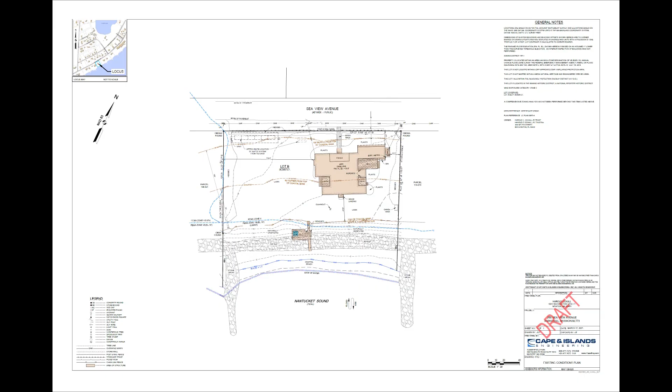Yes, thank you. Will you be clicking through as you go? Yep. Okay, thank you, Kurt. So, when we looked at this site, we kind of tried to approach it a few different ways in terms of how do we obviously keep the structure, and enhance it to provide the use that the owners are looking for, in terms of a modest expansion and a renovation of the existing condition.

And given the unique layout of the home and its age, it has settled quite a bit in terms of its foundation. When you're just walking around the floors, they are all quite uneven. You could be in one dining room that has a 4-inch difference in a 12-foot span.

And then there's also the first floor layout itself, in terms of it just being a series of rooms and having the sort of unfortunate layout, in my opinion, of what was built as the 1907 servants' quarters on the upper right-hand side as the primary kitchen area. It's completely cut off from the main portion of the home, where you have to pass through a pantry to get to it.

And then above that section of the home, there is, for lack of a better term, a very illegal, non-code-compliant stair leading to 2 bedrooms. I've seen many old homes and it is not safe. It's winder treads, very narrow, not something to try to work with.

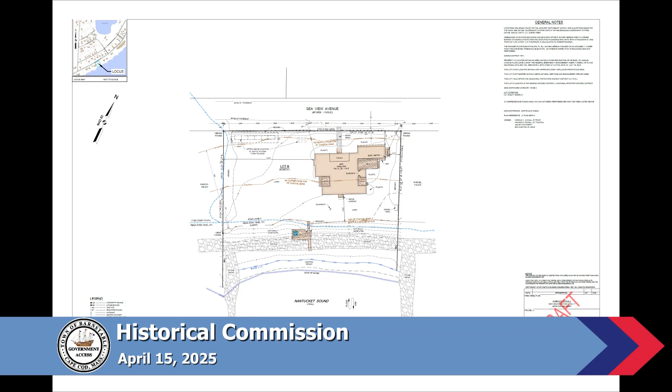So I guess if you could flip through to the site, to some of the existing photographs, please. Should be in order. Here we just have a location map for reference, and looking through the next slide, we go through the existing photographs of the home.

See, it's not advancing at all. Oh, okay, can't just touch the screen and make it flip all the time. I'm teasing. Bob, I have a hard copy of that upstairs.

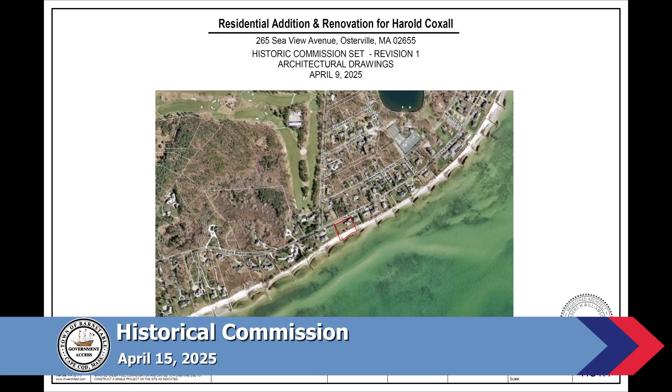Okay, there we go. So some of the important and remarkable architectural features of the home are the sweeping sloped roofs of the main body of the original home, gable dormers with the shed connecting dormer to make that Nantucket dormer, as we call it now.

Double hung windows, the walls do go right down to ground level. That is also a feature, but it's not great in terms of maintenance, as you can see from the photographs of the moss growing up from the ground.

Another important architectural feature is how there was a gambrel element on the right-hand upper corner of the main body of the house that, maybe I'm just assuming, but may have inspired the design of the 1907 wing with the gambrel roof structure, and the Riverstone fireplace with the second floor overhang. Then that turns, and the chimney turns into a painted white brick chimney from there.

And then another architectural feature I thought was important was the bay window to the right of the fireplace, where that is not facing the street, but it is visible from the street given the way the house is sited and how much open space there is on the right-hand side.

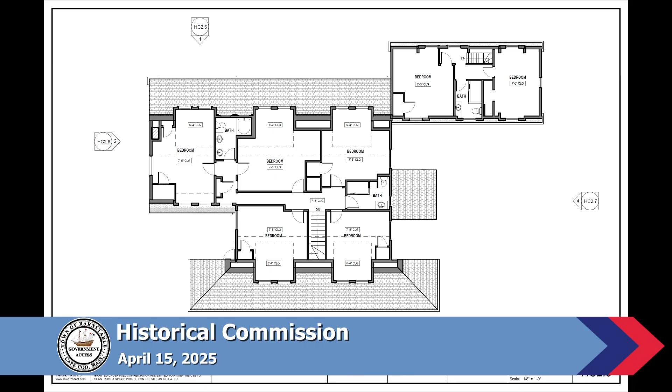Also note on the dormers, this is where the dormer reconstruction, or raising the dormer roofs, we feel is necessary because we have 6'4" ceilings in the bedroom. All of those windows are double hungs and don't even come close to meeting an egress dimension because they're very short, about 3 feet high. And 6'4" is well below the minimum code height of 7 feet for a bedroom ceiling. On the right-hand side, upper right-hand corner, you see the 2 bedrooms being served by that one very narrow, somewhat hazardous stair.

Again, the overlay diagram shows which areas would remain and be reconstructed, and also the roof plan. We can skip this one and go to the next.

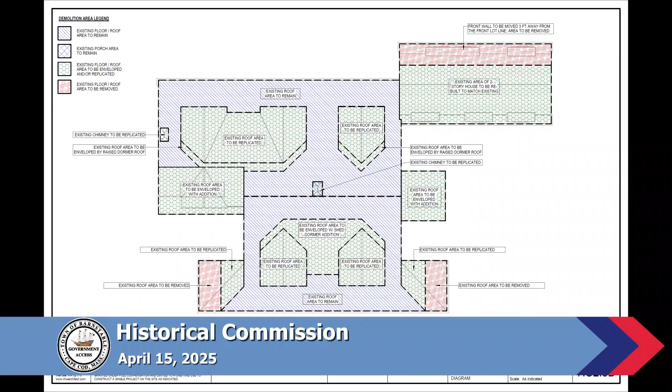And this is where I work. Sarah suggested I show the same diagrams to indicate which areas of the roof are remaining, which are being replicated or enveloped, and which would be removed as part of the construction. The dormers being raised up a foot would, as you raise the height of the roof, need to extend back to the main slope of the house, so that's where there's a bit of extension. On the back, we'd be proposing a shed dormer connection between the 2 rear dormers to match the front design, which allows for a bit of second floor bedroom expansion between those 2 bedrooms.

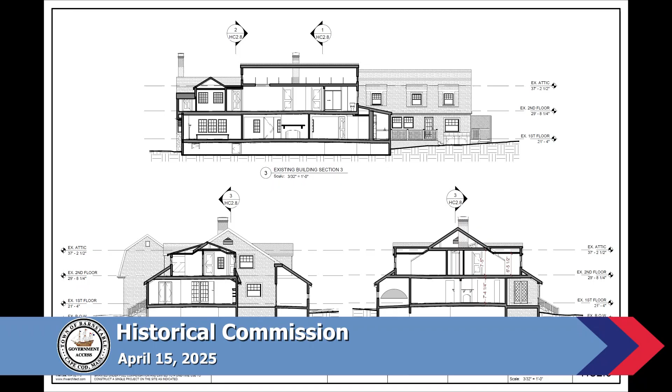You can really see it even at this scale, especially the section deflections, and on the porch too. The covered porch, sitting at a table there, has quite the pitch going up. It may have been built that way intentionally in order to drain water, you know that? Yeah, just saying. Oh yeah, but it's pretty significant, understood indeed.

So here we're moving on to the proposed portion of the presentation, where this is the architectural site plan showing the full extent of the site in terms of the reconstructed barn addition on the upper right-hand side, the small areas to be removed, the proposed two-story addition on the left, as well as the pool house on the left-hand side.

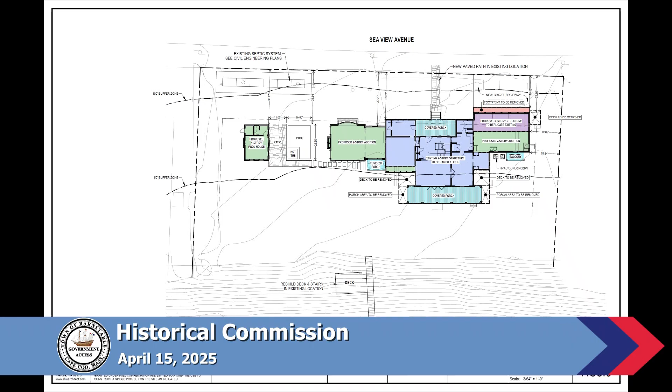So here we have the first floor proposed design. It's fun to look at now and see where it's come from since the beginning, in terms of the iterations we've done. I outlined the original section or footprint of the house in the red dotted line, so it's clear what's being added and what's remaining.

The idea is to basically keep the same entry sequence in terms of the covered porch, both the main entry door location, and there's even a secondary door location shown where I'm showing that door into the pantry, and just create a nice open floor plan where we have a proper stair in the foyer entrance, not towards the back of the house and leading back towards the street.

Give it a little bit more volume in terms of ceiling height, proposed approximately 9'2" ceiling height, and just a slight rearrangement of the spaces in terms of the living room, office, and mudroom, but still keeping the main center load-bearing wall in the middle. That's roughly where the stair is.

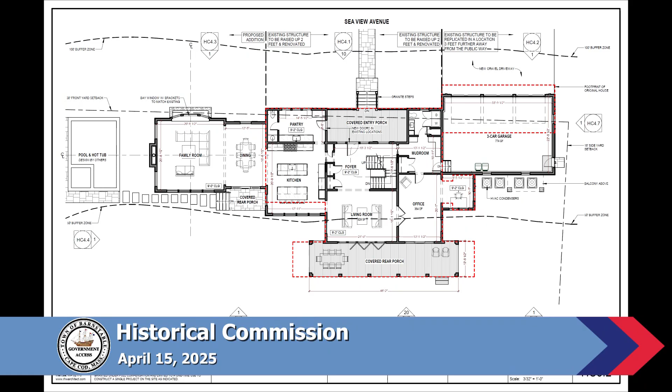Next slide, please. On the second floor, we've actually only proposed 6 bedrooms instead of 7, which was the existing condition. They are more generous and have more bathrooms in terms of them being ensuite, but we weren't planning on doing that. It's just the way the design came out.

In the previous design that was originally submitted, between bedrooms 3 and 4 on the lower part of the page, we did have a balcony proposed off the back of that, and through our working with Sarah, came up with this design where it's essentially removed. But I think where we ended up is a nice final design in terms of respecting the original architecture and proposing some modifications to meet the needs of the owner.

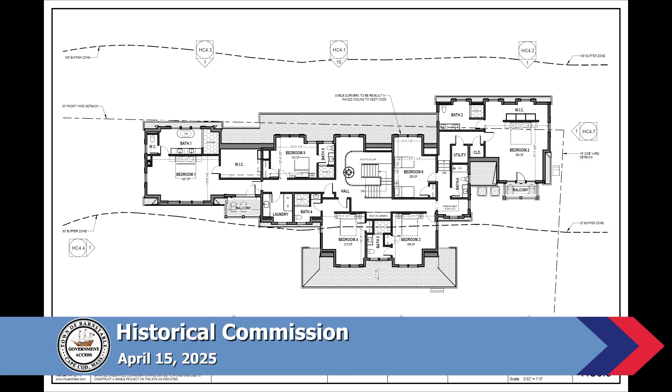Next slide, please. Proposed roof plan. Not too much to talk about here, other than we're keeping the original, putting a new wood roof on to match the existing, and same thing with the walls.

On the proposed elevations, we are just trying to keep the spirit of the main home, but also make sure that the investment the owner is putting into this property is a wise one, from a practical nature, by lifting the building up and bringing it out of the earth, and putting a foundation down when cladding that with stone, means that the new shingles you'd be putting on the home are not just sucking up moisture and growing moss on them.

So in my opinion, the front of the house, the main body, wouldn't show much notice of change between what's existing and what's proposed, given that the 3 dormers in the front would only be raised by a foot, and that allows us to have ceiling heights just above 7 feet, and have double hung windows that meet modern codes for egress.

On the reconstructed servants' quarters or barn addition from 1907, where we're proposing the 3-car garage, essentially the roof lines, in terms of the gambrel, were copied, and the dormers are rebuilt in kind to align with the new doors. They aren't in the exact location as they were, but the window height and window sizes are the same. I'm meeting egress by having an egress window on the gable end of that portion, so those windows are effectively the same size as the original.

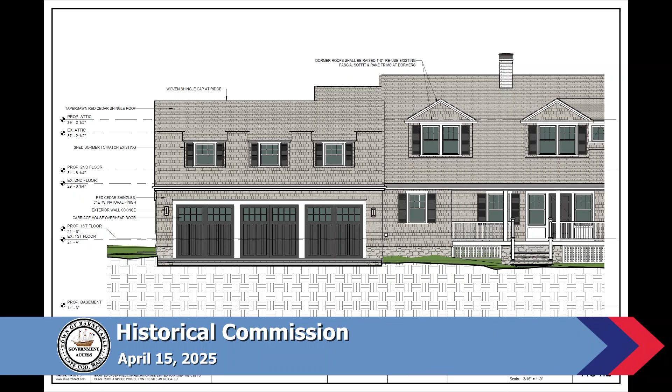Pause here. One thing we talked about with Sarah was making sure the dormers and existing details are being matched — that was very important, especially matching window trim details. It's actually not a very complicated trim package for the home.

It's 1x5 casing with historic sills, very common louver shutters. It does have a wood gutter profile — some of it has a bed molding below, some doesn't. I'm showing a new fiberglass gutter with bed molding and a simple fascia board to match existing. The bay window is bigger than the original; it would look weird otherwise, so I scaled it a bit for some wider windows so it doesn't feel out of place, and added new brackets to match the existing design.

Little things, like below the existing porch it's all shingled wall all the way down — I thought a stone base for the stairs, a pier at each column, and lattice was a more appropriate design for that. Next slide, please.

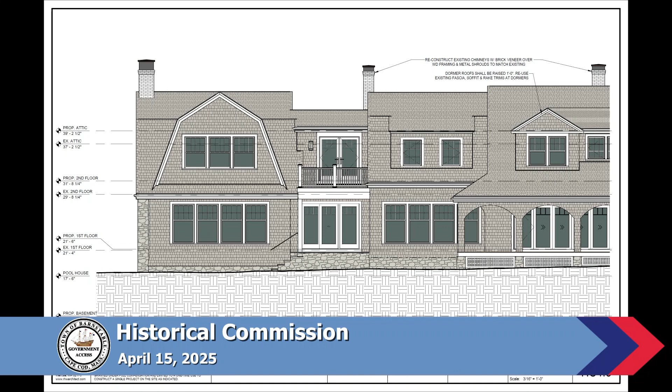This is the rear detail elevation of the addition, and just thinking of some important features to call out here — nothing that I haven't covered already. Next slide, please.

Same thing here. One area I didn't talk about specifically is how the rear portion of the reconstructed barn is handled, because the barn is not the proper depth for a garage, so it has more expansion towards the rear. Essentially I took that side gambrel elevation, copied it, and rotated it 90 degrees to bookend this piece of the house.

Facing the ocean, and likewise with the second floor addition above the existing one-story connector wing between those two areas — that's another area where I took the gambrel profile from the opposite side of the house and brought it over to this side to make that roof transition.

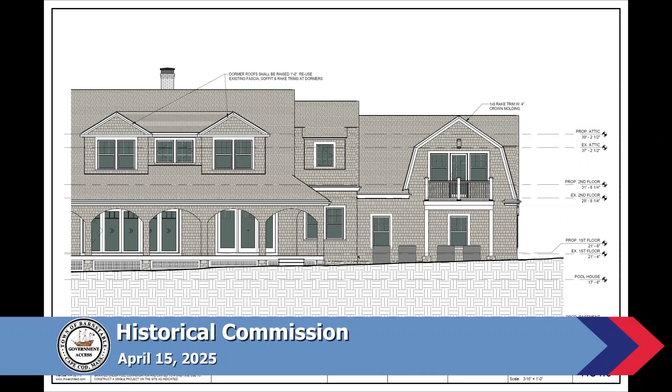And to my own surprise in the design process, there's a very basic roof cricket to handle that — there isn't a really bad snow catch that jumps out. You're not snowing anymore anyway, it's okay. But anyway, just wanted to make sure the whole roof design comes together nicely.

Next slide, please. This is where I was talking about, in terms of the right-hand side of this elevation, the existing profile overhang of that 1907 barn addition — so we're keeping that.

I didn't show any building sections here, but I will have a unique detail to make that work. Right now the 2x6 floor joists cantilever out to make that overhang, and we'll need engineered wood joists for that. We'll have to do some kind of engineered system to get that cantilever out, because I'm not going to cantilever 14 inch wood out and ruin that. I've got a plan for that.

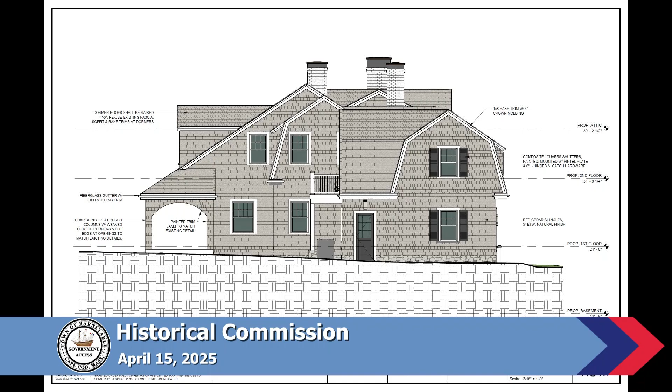This is the end of the proposed elevations. The next few slides were for the pool house, just a simple floor plan, with a nice little modest design inspired by the architecture of both the original home and the addition.

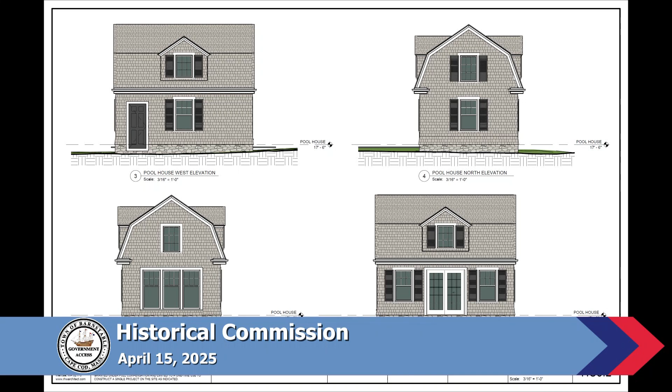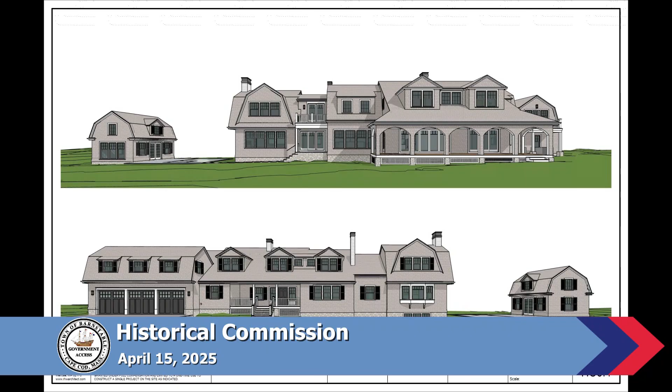Next slide please. Now we just have the 3D views for the full context. Feel free to flip through.

We could pause there. This is a good view of the arches and how we'll take the shingles down, cut them on the arch, and have a jamb return to pay reference to the original detail for the rear covered porch. We weave shingle corners on the outside, but then use a painted jamb with an exposed shingle edge at each opening.

And then I think, is that the last slide? Another one? That's it. Okay, so thank you very much.

That's awesome. Do you guys have anybody else who wishes to speak, in terms of your own team and such? I don't think so. We do have Harold, he's here, the owner. Greetings. Thank you for coming. Bob has done a great job going through it. Yeah, I do too.

Those are great drawings. One thing I'll share, and I don't feel it's necessary in this one, but one thing we've learned over a few hearings recently is the value of 3D renderings that are a little more indicative of the planes of front and back. Looking for dominance of structure, you want to be sure the new additions are subordinate in every way to the original, which these are, I think, in my opinion, but it comes across visually a little more compellingly in a rendering than in a 3D CAD drawing. Just sharing that out loud because I think it's a little easier for commissioners to compare prior and present, existing and proposed, but these are awesome.

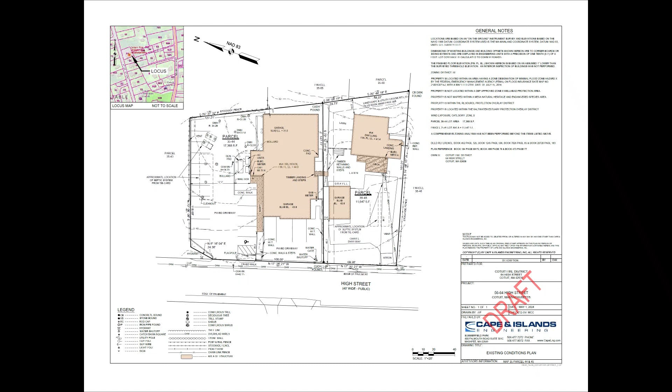The first plan is the site plan, or the existing conditions plan. On the right side is 64, the current fire station. The 56 lot is the house and garage structure closer to the street, which we previously were given permission to demolish and remove.

Again, this is the two lots. We have made application for site plan review before the town to start the planning process, but we wanted to come through this commission first.

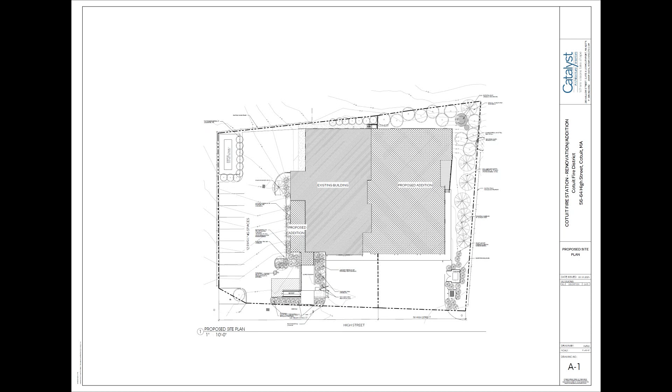A2 is the demolition plan, and the lines shown in broken line are the elements or structural elements—windows, doors, walls, etc.—that will be removed.

It's a little deceiving here in this plan. I wanted to point out that it looks like a lot of broken lines on that original mass of the apparatus bay, which is the two right garages of the three, is the center mass, the historic part of the building. We're showing the overhead doors and everything, but they're simply proposing to replace them. The physical structure itself will remain.

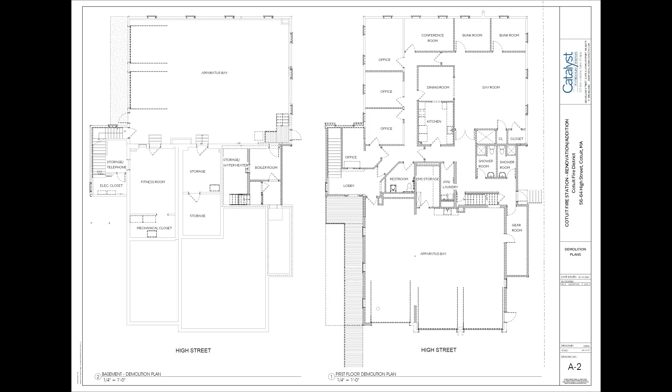The next slide, A3, shows that the second floor space currently is an open office, a storage room, and a toilet room. Proposed to take that out.

Originally we thought this was going to be full of mechanical air conditioning equipment and ductwork, etc. Turns out more of that's going to be on top of the roof, hidden between the building masses, which I'll point out later.

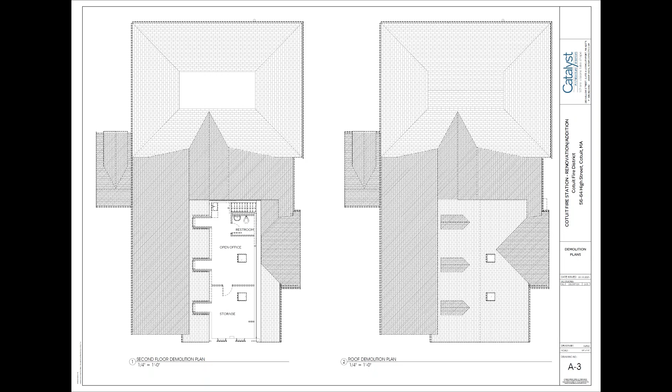But the three little dormers in that space are going to come off, proposed to be removed to make way for the framing of the new roof over the new entrance, lobby, triage room, and captain's office.

A4 is the basement, or lower level, which shows the old historic stone foundation, and then all the other foundations from a variety of additions over the years. The concrete walls—some were formed by hand-built forms out of planks, others have a bit of brick here and there—but you can see the stone as you crawl through the underbelly of the building. Then the lower apparatus bay, and to the right side of the page is our proposed addition.

Do you think there's any part of the original building that's older than the 1930 date? I'm just listening to the description of the foundations, and a couple of them sound like they would be earlier. It isn't critical to this matter, I don't think, but I'm just curious. The record originally says year built 1930.

Loose rubble stone and hand-formed with plank, concrete poured foundations - we think these are very early 20th century, earlier than 1930, typically, though not always, since things lingered.

No matter, I'm sorry, I didn't mean to interrupt your flow. That's okay, you're doing great.

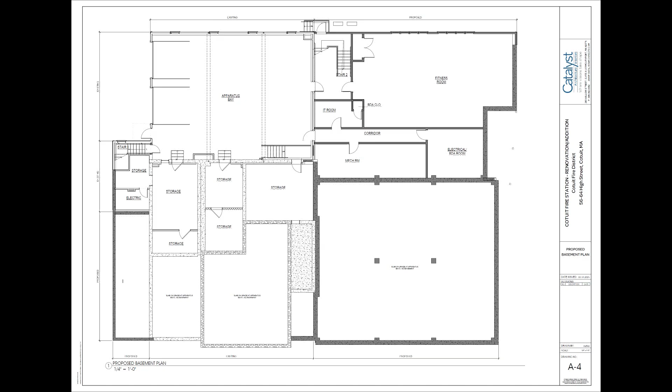A4 is the proposed floor plan of the lower level, and the large rectangle in the lower right is unexcavated space below - not a crawl space, just an open structure there.

The next page is the proposed floor plan of the entire main level. Again, the two ambulance bays in the lower left quadrant are the two center bays in that historic portion of the building. The third bay we're removing is where the triage room and entry vestibule are now.

This plan is a little more organized than the old one - we have the captain's office, the fire district, and the fire district's business offices, also called the treasurer's office. There's a conference room, deputy chief's office, and a training room, which they don't really have now - they currently use their day room as a training space.

The center of the building is going to have a proper EMS storage room and a proper decontamination room, which they don't have now - they've got laundry machines down in the lower level, basically with coats hanging on clotheslines to dry. There's going to be proper equipment to disinfect, clean, and dry their uniforms and turnout gear.

A bigger storage gear room, and in the back there, we've got five bunk rooms, shared restrooms, a big day room, and a small deck, which is actually our second egress out of that level.

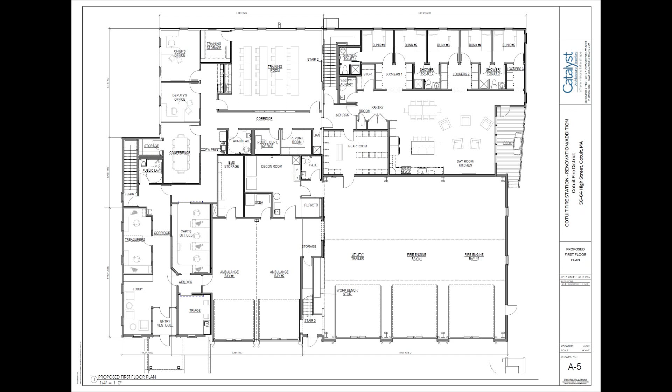A6 is the second floor plan, the mechanical room. We're not going to have too much mechanical equipment in it now, because the majority of our HVAC equipment is going to be on the dark shaded area, which is a low pitch membrane roof between the existing gables and the proposed gable of the new apparatus garage.

The upper left quadrant is the 1991 addition. It looks as though it has a swimming pool in the center, but it's truncated in this view - it actually comes up to a peak there. We've got a unique way to hide the HVAC equipment, with a parapet wall and a single slope shed roof wrapping around almost two sides of that back upper right quadrant.

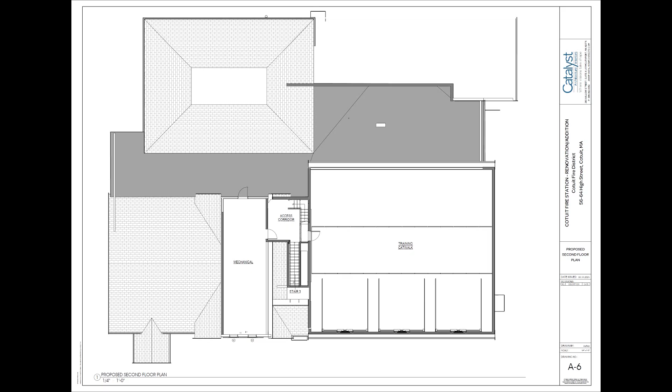The roof plan on A7 shows the whole roof in its entirety, but that little lane through there, that well, is where we're hiding the HVAC equipment.

When this was printed a couple weeks ago, it located four AC units. There's actually going to be two larger rooftop units hidden in there as well. But we've got a roof screen on the right side and the left side to prevent the view of that from the parking area or from the abutter next door on the right.

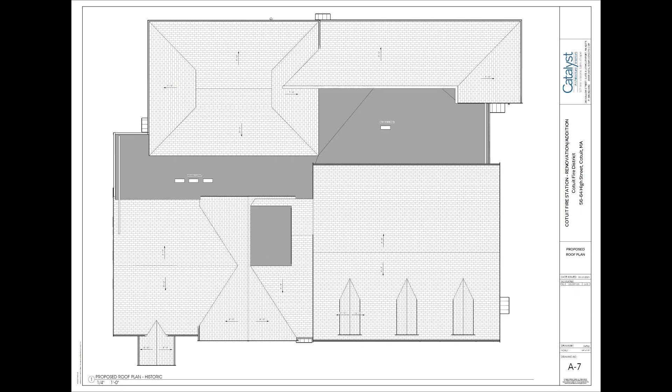Finally, getting to A8 on the elevations. We've stacked the existing elevation in the lower half of the page and the proposed elevation in the upper half. You can see that from left to right, we've got our new addition with an entry vestibule.

You go in, there's a little waiting lobby and the triage room in the second window from the left. We propose to remove and replace the two overhead doors with more of a full light glass door, which will match the three new doors in the right half of the drawing.

Of course, the addition is much taller on purpose so that we can acquire larger fire trucks over time that are taller with ladders on top - custom fit fire trucks anywhere. These custom trucks are a lot more expensive than the standard ones.

On the proposed addition, we also brought back the three dormers, so they're now facing the street rather than being on the side. It just adds a lot of scale, I think.

We also have a little peek of the rear portion of the building visible down the right side, where you can see a little overhang over a door, then beyond that a deck and a rail at the deck, and a shed roof enclosing the bunk room space beyond. So it is twice the width, but we're trying to keep that old gable there with the old windows. And the sign will be reused.

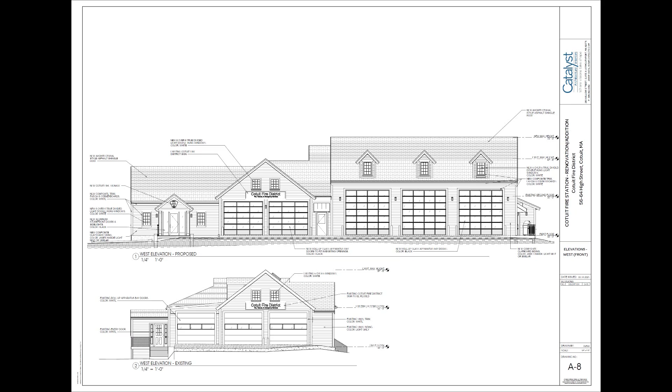Turning to A9, we've got the two side elevations with the left side of the building at the top of the page, and again we've been building from right to left. We'll be building a new sidewalk, a new handicap ramp down to the parking lot from that entrance sidewalk, a new railing to prevent people from stepping off into the handicap parking area to the new front door.

The flagpole will be new. This gable here in the center of the top elevation is new, and that goes back and is overbuilt about halfway back into that original mass. That's the reason for eliminating the dormers in that original site. We wanted to do something that kind of built a ridge that was parallel with the road, that created that well, that hid all the rooftop equipment that we knew we were going to have.

And then between the 1991 addition on the far right and that new gable, we've got the roof screen with a vertical picket. That'll be detailed with a 5.5 or 6 inch picket with a 1 inch gap, so a little bit of wind can blow through it, but it really obscures your view of the equipment that would be behind it.

At the lower half of the page is the old elevation. The salt box shape is that stair that takes you from the front entrance down to the lower level. This A10 is the right or east elevation.

Rear elevation, east side. The right side of the page shows the existing condition on the bottom, and reorganization of the windows and reimagination of the windows in the training room and the office space upstairs, because the program behind that wall is changing and the interior partitions are moving.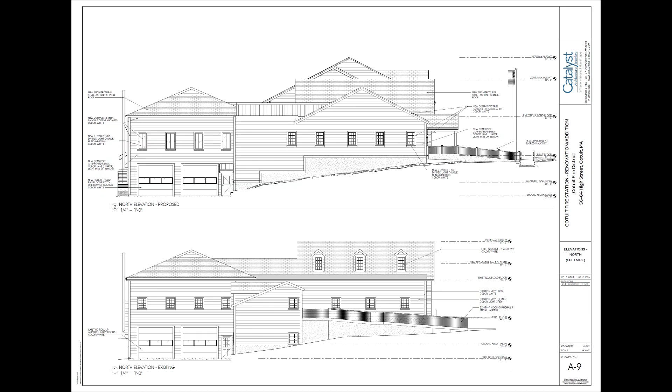Great, thank you. Perfect. And then A9, A10, 11 is now the right side. And again, at the bottom of the page is the existing elevation. The little man door on the left is the way into the old historic mass.

The skylights will go away. The gable there is our turnout gear. That entrance in the middle of the drawing, the lower drawing, will go away. This side of the 1991 addition will be obscured by the new addition.

The top of the page shows you how the different roof lines work, and then the deck is inset into a little recess with a roof screen on it again to hide what's behind it. I'll pause here, and the two windows that are in the top left main gable, which is our apparatus garage...

During our design review meeting last week, we were talking with the fire department about what's going in the apparatus garage on that wall. We suggested that the windows there, although nice in the elevation, may not be advantageous because of the equipment going on the wall - workbenches, things hanging, tools, implements. And does the neighbor really need to see into the apparatus garage from their side?

Now, there's going to be a very extensive amount of landscaping. The neighbor already has a 6-foot stockade fence, which will block most of their view of this elevation. But if the commission would agree, we'd like to omit those two windows in the top left.

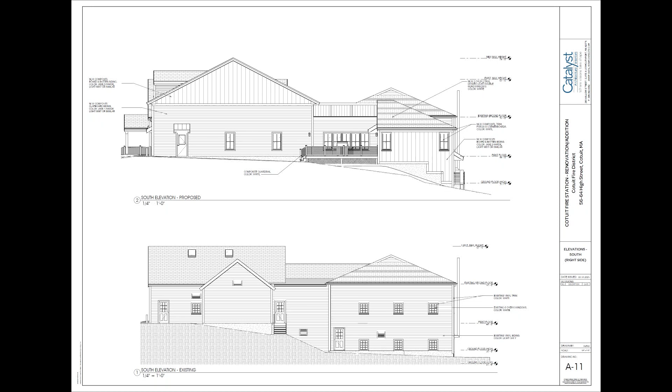You have special needs for public safety, so I apologize, it's a pretty big wall without any fenestration. The addition is higher because you'll have larger equipment in there. I tend to agree with that. Watching Barnstable go through their hearings before Old Kings Highway, they had a wall facing north with the exact same question about windows, and it came down to the functionality of the space immediately behind it. It wasn't appropriate, and it was approved without windows, so I think your decision to eliminate them, unless someone feels strongly, is not a big deal.

So that was the end of our drawing presentation.

The other thing I wanted to point out is that in our application we proposed a wood window with vinyl or aluminum exterior, true divided light, with white sash and white casings. On our drawings, our intent was black overhead doors with full glass in all 5 bays. The black makes the partitions disappear more, so you look through to what's on the other side. So the question came up after we submitted this: would the commission mind if all the window sashes were black with white casing, or would you like us to stay with white windows and white casings?

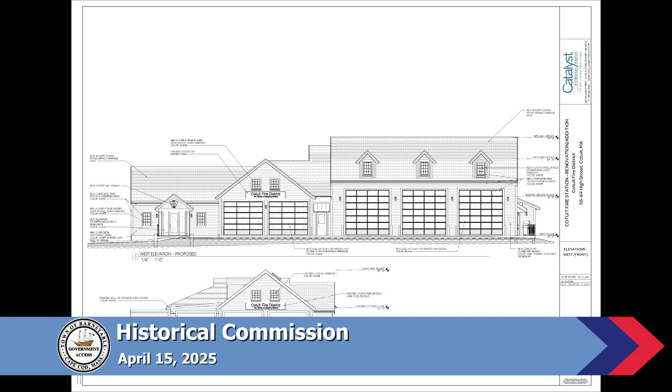They used to paint screens black so you didn't see window screens. It's true, you can paint something black so you don't see it as much, except from the outside, sometimes black against light-colored siding pops, even with trim around it. You're going to have to make your own choice.

Chief, do you have anything you want to say about any of this? I mean, you're going to live there, at least for a while, right?

Yeah, thank you, certainly. Sean Brown, Fire Chief, Cotuit. Thank you for the time to be present in front of the board. Could you sign in for us? Yep, I'll sign. You can keep talking, I'll sign, he can forge your name, a good autograph, that's fine, we all know you're here and you're on camera.

Thank you for the opportunity to present in front of the board. Part of the fire service is embracing our traditions as we progress to meet the needs of the future, and just like everything we do, I think this project really embraces that desire to maintain the tradition of service to the community as we prepare to meet the needs of the future.

Thank you very much, we appreciate your coming in. Because it's so substantial, and this is true in Barnstable and most towns on the Cape, you're building something that will essentially be a landmark building visually for your community. I think this looks great personally. Thank you for helping keep our old building still standing, which means a lot. Yeah, that's really nice.

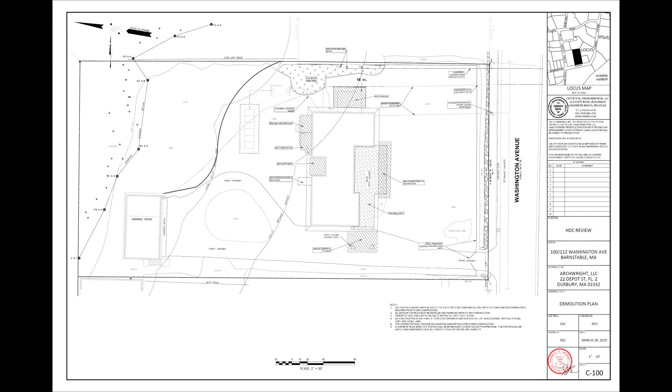To the plan south or west side of the property, that's the porte cochere that we're removing in order to lift it, and again, shortening and moving up on the plan view. And then the front porch on the front side, we're removing as well, but again, rebuilding pretty much in kind.

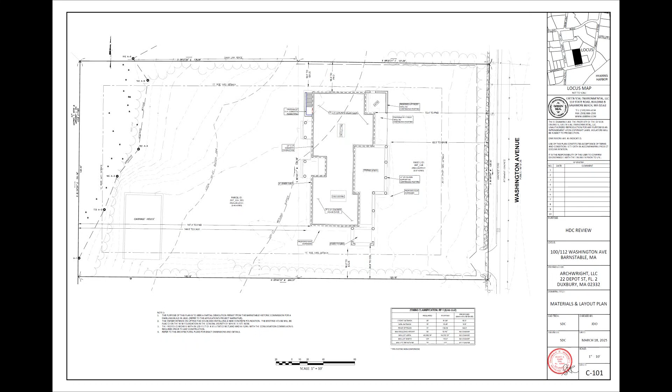Next slide, please. So in terms of footprint changes, on the plan north or the eastern side, we're squaring off the back corner there to expand the kitchen on the interior. We are adding 2 modest porches on the back or north-facing sides. Again, the porte cochere on the plan south or west-facing side, rebuilt in kind, just 2 feet shorter. And the front porch, we are rebuilding pretty much the exact same footprint as the existing. Next slide, please.

Do we have the HR drawings? They may be at the end of all this. I think it'd be easy to walk you through the changes on the exterior elevations and then circle back to the floor plans, which are the most important ones for our considerations anyway. Okay, yeah, that's good.

So what I did is I prepared these drawings. The top drawing in this and the following slides is the existing house, and the bottom one is what's being proposed, so you can do a direct comparison between what is and what will be, which I found to be quite easy to read.

If you kind of squint, they're the same houses. Like I said earlier, the doors and windows are primarily in the same, if not similar, locations. We are changing from 6/6 grill patterns to a 6/1. On the second floor, there's a couple windows that have been stepped through to get to what wasn't supposed to be a roof deck, but was used over the years as one. So we provided doors so people can get out there safely. The scale of the windows is increasing a bit to allow more light in and be more proportional.

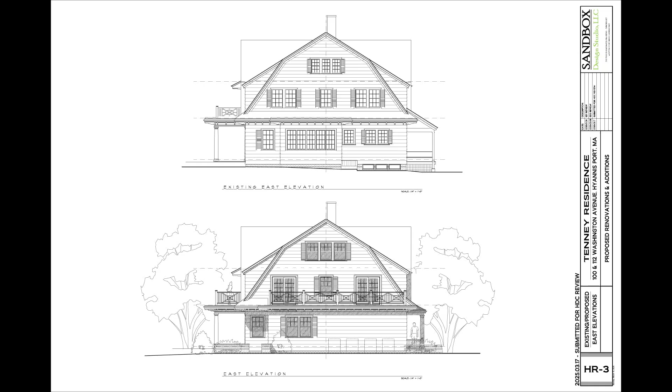So the north, or rear-facing side, again from a form standpoint, we're not changing too much. On the top elevation, like I mentioned earlier, we're removing that shed roof porch from the back and adding 2 smaller shed roof structures. One is going to be the family entrance, and the other, on the right with the double French doors, is going to be the primary entrance, because all of the parking, guest, and family access are on the back side of the house. So this is really going to be used as the primary entrance.

Even though there is a similar entrance on axis with this one on the front side of the house as well. It's the Cape, you're not supposed to use that door, it's very informal. Carolyn keeps telling me he keeps formalizing it. It's like, we don't lock the doors. No, you're good, okay.

So the larger window just to the right of that entry we talked about, there is a stair inside there. The existing house is not insulated, there are no interior finishes, and it's very dark on the inside.

One of the goals for the project is to allow more light to come in. We're going to insulate it and have cleaner interior finishes to help that light bounce around. But we really wanted to bring some light in at the stair, where we could get a nice tall window.

I love that, but now you have no architectural feature for an outdoor shower. That's going somewhere else - we're not exactly sure where. We wanted to keep it off of the main house because of the beautiful architecture we're hopefully doing here, and maybe it becomes something secondary over at the carriage house property.

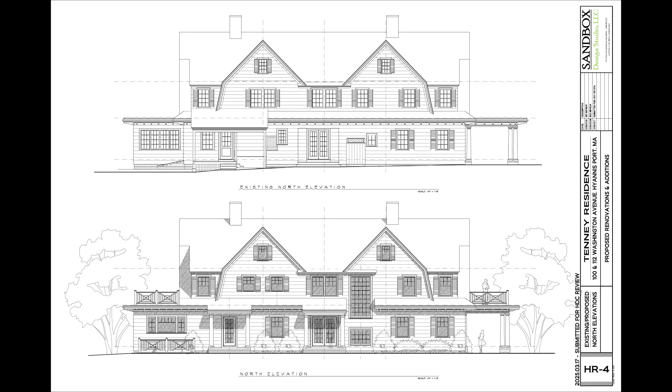You don't appear to be raising the house much above grade. Are you proposing to raise it? Fourteen inches is what we're thinking right now, but we're also thinking that we'll manipulate the grade a little bit too, because there's one spot on the bottom elevation, on the right, where the house is like 2 inches from grade at the bottom of that shingle.

So we are raising the house, but we do want to pitch everything away from it too, since the current house doesn't have great water management. You're super pleased with the grade the way you've drawn it, which is what I liked - that's one thing we like about the house, especially on the water-facing front side. There's an existing covered brick patio that's really like an outdoor living room, so keeping that relatively close to grade is something we're trying to strive for, though we are adding a couple of steps to get it up a little more.

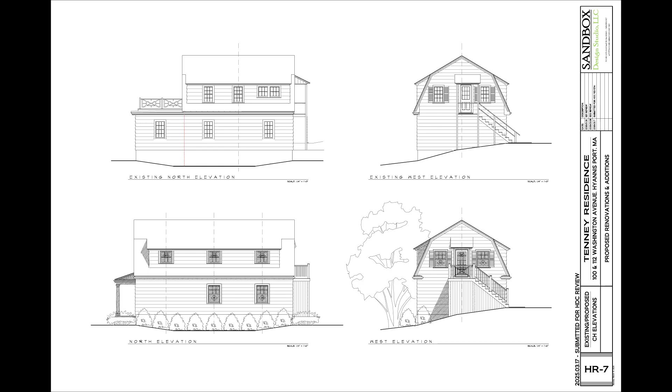Alrighty, I think we all had a pretty good chance to look at this as well. We tended to look at them both at the same time, which is not too surprising, makes sense, right. And pardon me for taking longer than I probably should have, I forgot that they were being run as two separate things, and we need to make sure we finish.

Could I have a motion to close the public hearing? I move that we close the public hearing. Second. All in favor of closing the public hearing? Aye. Public hearing is closed.

So Barbara, could you please read the motion? She's gonna be hoarse. Yeah, I know, I appreciate that. We'll have to rotate this job around a little bit next time.

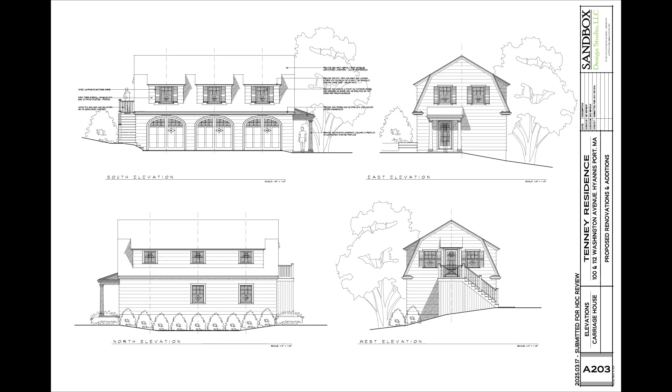Motion on Zig Harbor LLC, 112 Washington Avenue, Hyannis, map 287, parcel 116001, built 1920. Contributing structure within the National Register District of Hyannis Port. Partial demolition: right side garage bay to be removed completely and rebuilt. Existing second floor to be extended over third bay and construct new dormers on north and south facing elevations. New stairs, railings, and roof system.

Window changes. Motion 1: I move that after review and consideration of the public testimony, the application and associated materials, the significant building at 112 Washington Avenue, Hyannis, is a preferably preserved significant building. I'll second that. Thank you, Nancy.

An aye vote will impose an 18-month delay. A nay vote will not impose an 18-month delay. Nancy? Nay. Barbara? Nay. John? Nay. Robert? Nay.

Second motion: if motion 1 fails with a nay vote, I move that in accordance with section 112-3F, the Barnstable Historical Commission determines that the partial demolition of the building located at 112 Washington Avenue, Hyannis, is not detrimental to the historical, cultural, and architectural heritage or resources of the town.